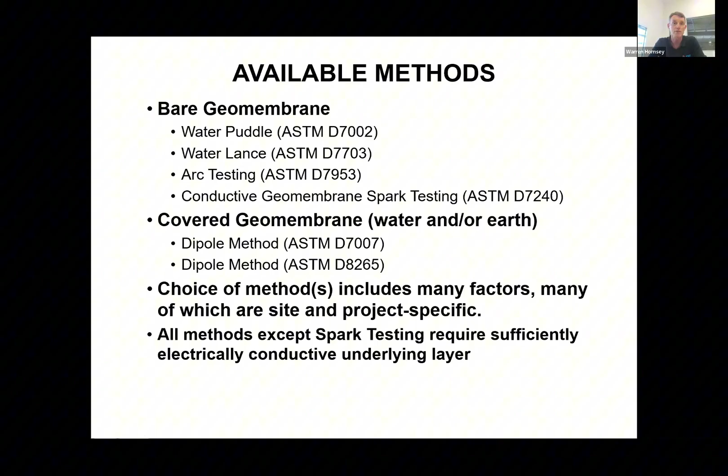There are two basic definitions: bare membrane surveys and covered geomembrane surveys. Bare membrane surveys, done immediately after installation, are easy to perform but extremely operator dependent—if your operator rushes through the job, you may not pick up holes. It's real-time detection, so there's no data collection; you just find the holes. It can be affected by dirt and moisture, but it's very sensitive and reliable. Covered geomembranes are extremely difficult to survey, and there are certain requirements that need to be sorted out before the project is constructed—it's no good coming afterwards without isolation, as that affects results. In terms of sensitivity, it's highly variable and depends on site conditions, from cover materials to subgrade conductivity and so on.

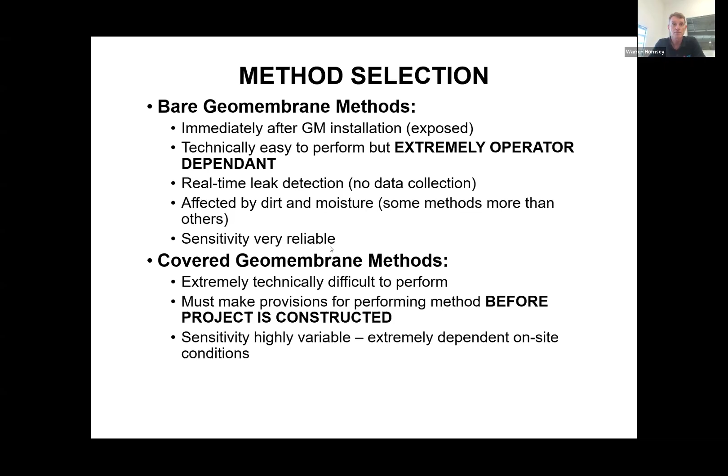In terms of bare membrane surveys, there are the water-based methods, ASTM D7007, the water puddle method. It's a fast way of doing surveys—if you have a nice wide puddle, it's good for dirty, wet survey areas, and it's more effective on wrinkles than the arc testing method. The disadvantage is you have to drag hoses around the whole site, which can be a problem with sandbags weighing down geomembranes. You need not only the surveyor but essentially two labourers to pull and move hoses around. You also can't do it on side slopes.

As soon as you add water and work boots on side slopes, you start sliding down the slopes. It does require clean water. You can't just be pulling water out of ponds because it blocks the sprayers. And isolation is critical. Basically, if you have this water collecting in a sump that is earthed, as soon as the water trickles from the machine to the sump or the earth, the alarm goes off. So that's one of the disadvantages.

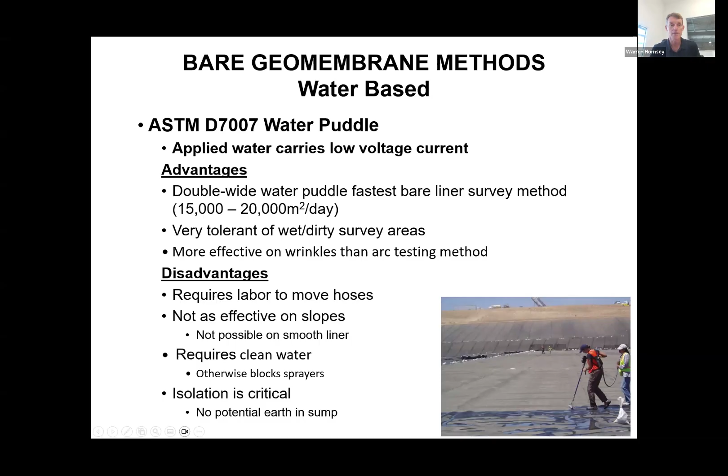Okay, next slide. The water lance method, this was probably one of the early methods of carrying out surveys, and it's essentially a very small area that you're surveying at one time. And it's good for pipe connections and seams, also very tolerant of wet and dirty survey areas. And it's certainly more effective on wrinkles and seams than the arc testing method. The problem is it's very slow because you've got this small concentrated area where you're spraying water on, that's probably 5 to 10 millimeters diameter.

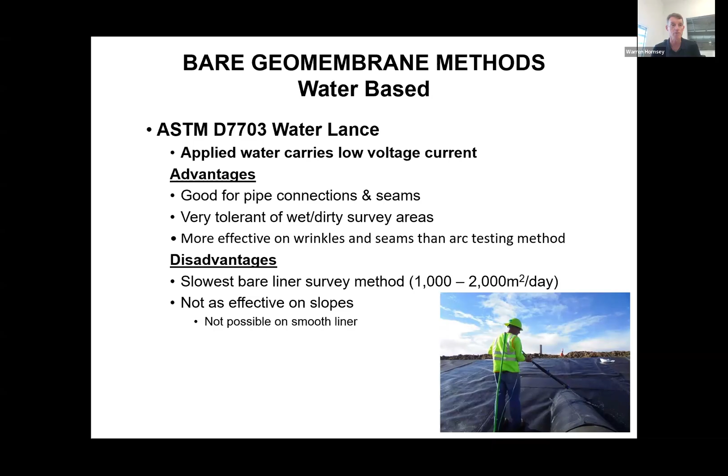And it's just not possible on side slopes. Again, slip hazards are a problem with that. All right, the next slide.

If we go to the arc and spark methods that are out there, we do a lot of this testing on bare membranes because we can find really small holes and they're not limited by water flow through the holes. It can be done on slopes of 3 to 1, but really anything above that, you need to have working at heights certifications. You can see on that image there, one of our technicians hanging off an abseiling rope, working on a large 1 and 2 slope. So it can be done.

It is very slow if it's done properly. You can do it very quickly. You can walk very fast over a site, but you're unlikely to find all the holes because you need to move slowly in order to find the holes. It's extremely sensitive to moisture. So the survey area has to be dry and it has to be clean. It'll earth out against dirt and give you false positives in those areas.

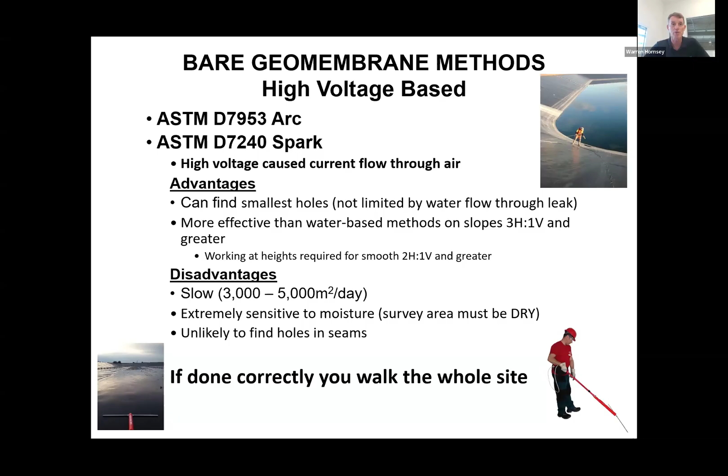And you're unlikely to find holes in seams because the spark will only jump about 25 millimeters. The good thing is that if you do this survey, you essentially walk the whole site, so you do a visual inspection on the whole site. Okay, next slide.

This is what is not acceptable with arc testing, is that you're not walking over the whole site. I mean, you can see the guys are not wanting to walk on a smooth slope, but they're not really pushing down the wrinkles. And these methods don't work on wrinkles because the spark only jumps 25 millimeters. As soon as you have a wrinkle that's above 25 millimeters, you won't find a hole in it. So essentially, the surveyor should be pushing down the wrinkles with their feet to make sure that there's intimate contact. Okay, so next slide.

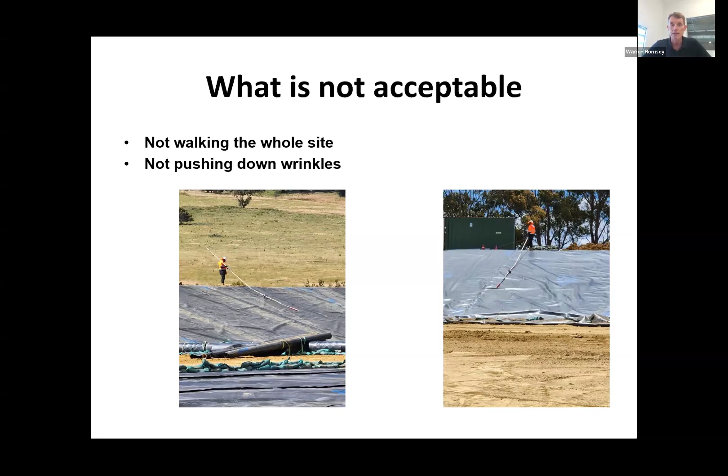The next method is the covered dipole methods or covered geomembrane methods. And the first one is the water dipole. We normally do these with 100 volts going into the cell. They're very sensitive, they'll find holes in wrinkles. And with some of the equipment, we can do mapping on this. Not all of the equipment, but some of the equipment mapping can be carried out with this.

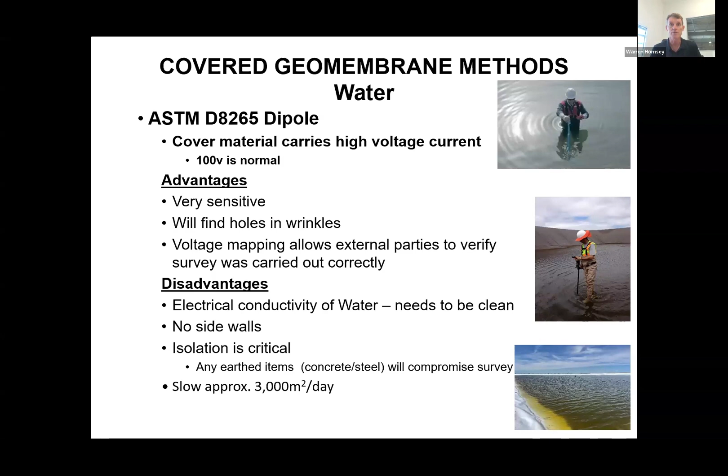One of the disadvantages of doing a water dipole with our equipment is that the water needs to be clean. We can't deal with high conductivity waters inside of there. You can't do it on sidewalls, so basically what we're doing is the floor of a pond, we can't get to the sidewalls. And isolation is critical. Any earthed items such as steel or concrete that are earthing out can earth out the signal and will not allow the survey to carry on. And it's very slow, we're looking at 3,000 square meters a day. If anybody's trying to walk through water that's knee deep, it's extremely tiring and very slow to do this sort of work. Next slide.

The covered geomembranes, and this is kind of most of the work that we do, is this type of work after the gravel's been placed. We normally run the high voltage, 500 volts is normal. We control the amps, so the voltage doesn't kill you, the amps does, so we'll limit our amps to within safe working areas. But the advantage with these methods, if you use a large 3-meter double dipole, you can get up to 25,000 square meters a day. That reduces significantly if you use a single dipole.

Voltage mapping allows external parties to verify the survey was carried out correctly. The problem is that moisture conditioning of that gravel is critical. If you don't have good moisture conditioning, you get lots of bad data, and then you can potentially miss holes.

Isolation is critical. If you have large loss of voltage through poor connections to sidewalls and so on, you again will miss holes. And you won't always find holes in wrinkles with this method, because the water won't necessarily run through the wrinkle and make contact with the ground underneath it.

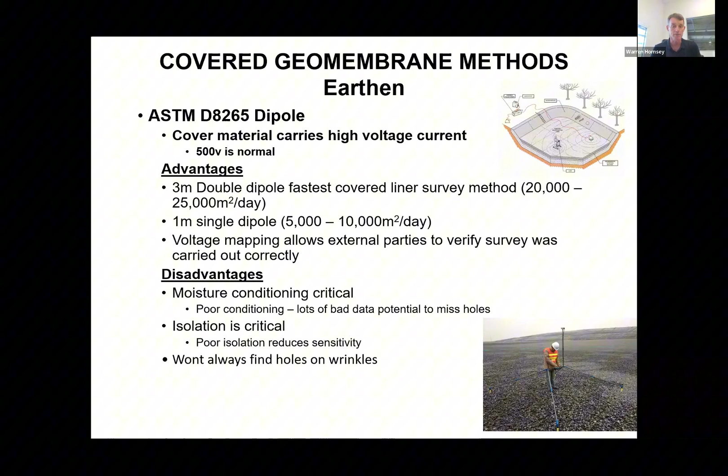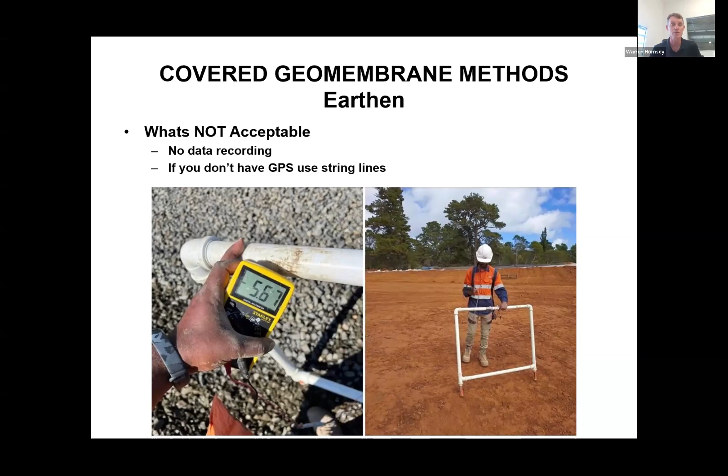Now, this is an image of about as basic a dipole survey as you can do. There's no GPS tracking of locations. It's just a simple handheld voltmeter that somebody has to record the data with as they walk along. Extremely slow and time consuming. This went out of date probably 15 to 20 years ago, so just be aware, don't be using people that use these techniques these days. That is old technology.

When you get the maps, this is the key part of it, really understanding what you're getting. What we're seeing in the marketplace is a lot of a tick-and-flick type attitude with this stuff, and we see mapping that doesn't really make any sense. What you're seeing in the upper left-hand image is a survey where we can't see where the data was recorded, and we see no contour maps of what the voltage readings are.

That's part of the standard. It requires you to show the contours, and it also requires you to show where you've recorded the data. So in the second image over to the right, you can see that the survey was carried out, but there were large areas where no data was recorded. That really is not acceptable from a standard point of view. So anybody getting a report should be looking at both the contours and where the data is recorded.

The image to the far right shows a good survey with regular recording values where you can clearly see the artificial leak in the top left-hand corner of the survey and the current injector in the center of the cell.

Now, the devil is in the detail with all of this, and the standard allows you to play with the voltage contours you see because every site is slightly different. But really, if you put a very wide contour gap on your survey, you can hide or miss holes. Depending on the site, you may have to have a very close contour spacing to really be able to see the holes and investigate the anomalies correctly.

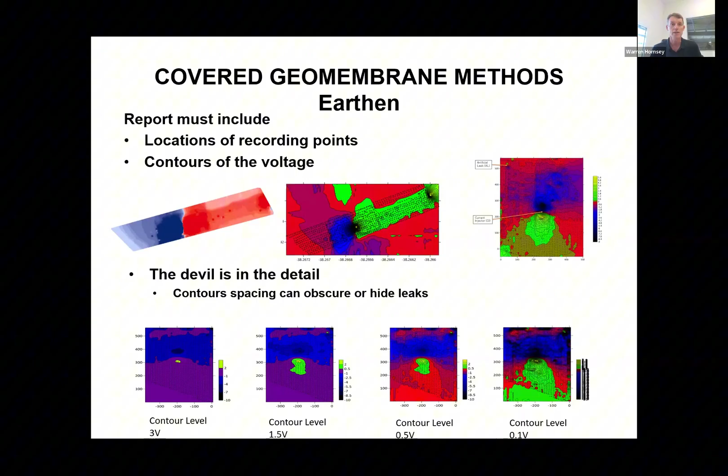The issue is that it's extremely hard to verify that a survey has been carried out to acceptable standards. But to give you an idea, we've been keeping track of our jobs since 2018. We've done 106 sites, 1.7 million square meters, and on average we see 0.78 holes per hectare, which is less than what GRI and so on initially indicated as 2 holes per hectare. But what we're seeing is that with good CQA, the quality of the landfill builds is becoming better over time.

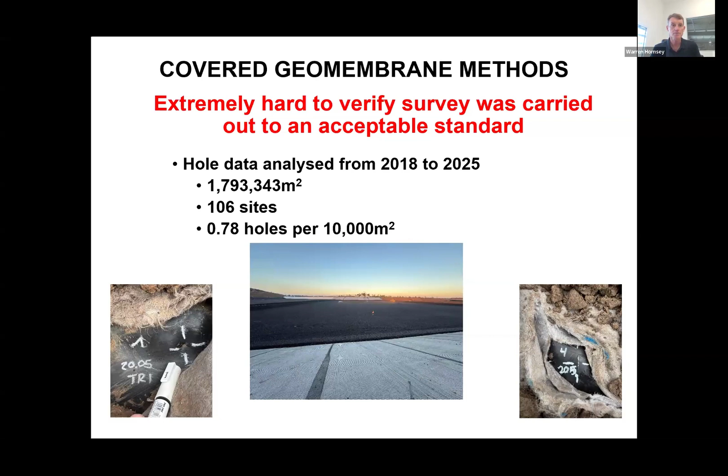So the way to double check this, which I'd recommend for everybody, is to put blind holes into their cells if they're building them. There is a standard on how it should be done. That way, if you go out and do a survey and your surveyor can't find your holes, then there's a problem either with your survey or the sensitivity of the site. Either way, you have to fix that to be able to verify that the cell has been built without any holes in it.

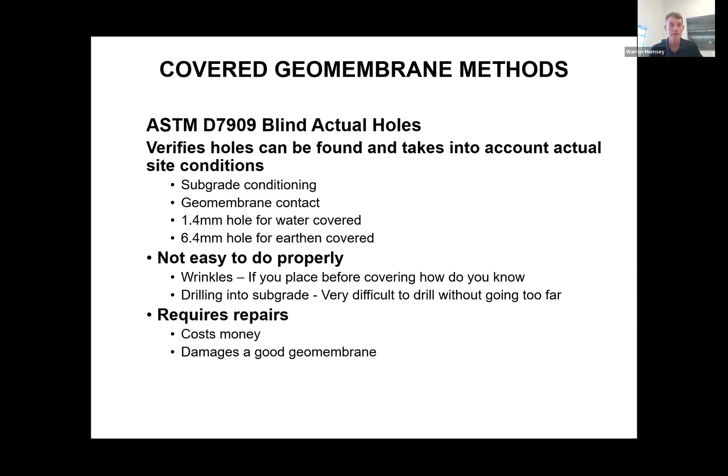Now, lots of people don't like putting holes in a perfectly good geomembrane. The only alternative to this is to put an artificial blind hole in. In other words, just run a wire, place it between the geomembrane and the cover protection geotextile, and have that as an artificial blind hole that people can find. The problem with that is it doesn't really confirm that the subgrade conditions are acceptable, but it gives an indication of whether the person's equipment is working correctly or not.

So I would recommend that everybody put some form of blind holes, whether real or artificial, into any one of their projects before they go ahead, so that you can verify that the survey has been done correctly. It's the only way that you can really verify that your survey has been done correctly.

Like Warren, there's a lot to talk about here. I'm Managing Director of LIS. We specialise in surveying deeply filled lagoons, and some of the challenges Warren talked about I'll discuss in a bit more detail.

As a quick background, what we're really looking for in electrical leak detection is current flow through an insulating liner. If we look at this left-hand panel, we can see current flow - this is a modeled result - through an insulating liner. In almost all scenarios, we're looking to gather data in the overlying conductive medium, whether that's soil or water, using our electrodes and dipole to measure the change in electric field as we pass over the leak.

The right-hand plot shows what a technician or interpreter is looking for when trying to find a leak - this is the classic dipole type signature we might all be looking for. If you're running the 7007 standard, an operator might be looking for this live. If you're using the latest 8265, we're looking for this in a map, as Warren showed, and I'll show some maps as well. So this is really what we're looking for.

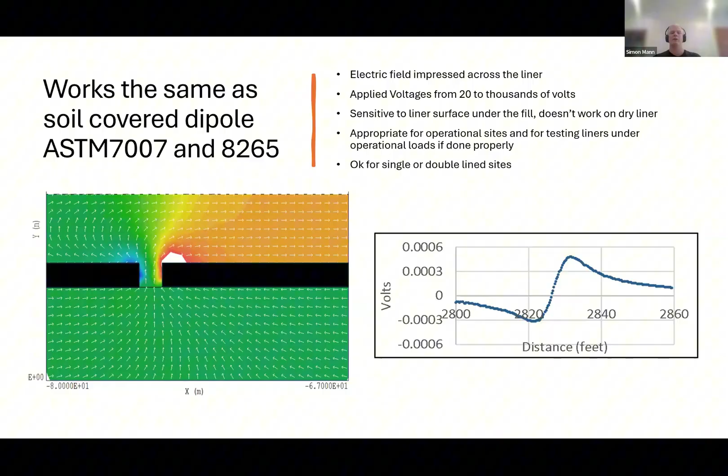We're sensitive to damage beneath the conductive medium we're surveying in - that's below the soil, or at the waterline or below the waterline - and it's appropriate for operational sites, testing the liner under operational loads. We do work on single or double liner sites.

Why are we testing filled ponds? If they're built properly, constructed properly, and used properly, leaks really shouldn't be an issue. But typically our clients have one of a small set of problems: either they know they have a problem, they suspect they have a problem through indirect means, they can't afford to have a problem - i.e. it's a high-risk site - or they need to show they don't have a problem to meet their license obligations.

The benefits of doing this: it's operationally convenient, and less damaging to the lining system to survey it while covered than to empty it and potentially damage it further. It may be your only option if you don't have anywhere to put your waste or water. It allows a targeted repair - if a survey tells you there's a leak in a particular area, you don't need to empty or clean the entire site to access it. And it may be more appropriate to test under an operational load.

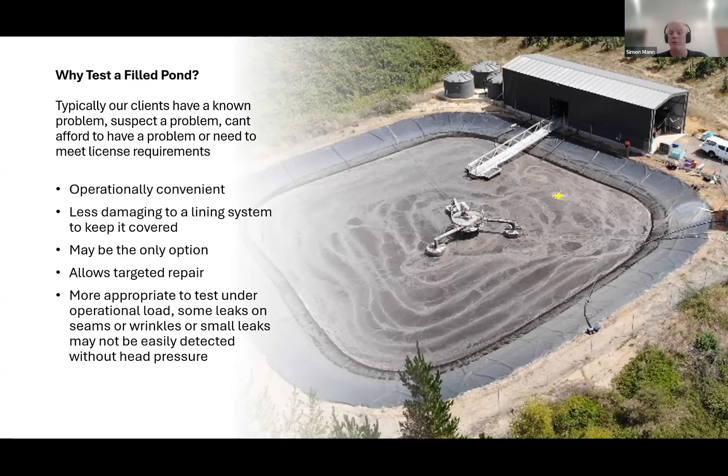And Warren touched on this as well. If you've got a wrinkle, or depending on what your dry liner methods are, you may not be sensitive to all leaks. So that QC process may not pick up everything.

So in terms of where this technology is best used, I thought we'd talk about who uses us, because that's what we know. This site here is a site near Adelaide, a small fruit producer in an ecologically sensitive area. He needs to meet his license obligations, to assure the EPA that his site is being monitored and doesn't leak. Typically, before he found us, his approach would have been to get a crane in to lift out this aerator, remove a walkway, empty the pond, which stops his operations, by the way, clean it, and have dry liner methods used. Obviously very expensive and very disruptive to his small business.

In this image here, you'll see our little boat. You'll see that a few times in this presentation. We turn up and we do this job in half a day. And out of interest, we have found leaks in his site and have helped him towards a leak-free site.

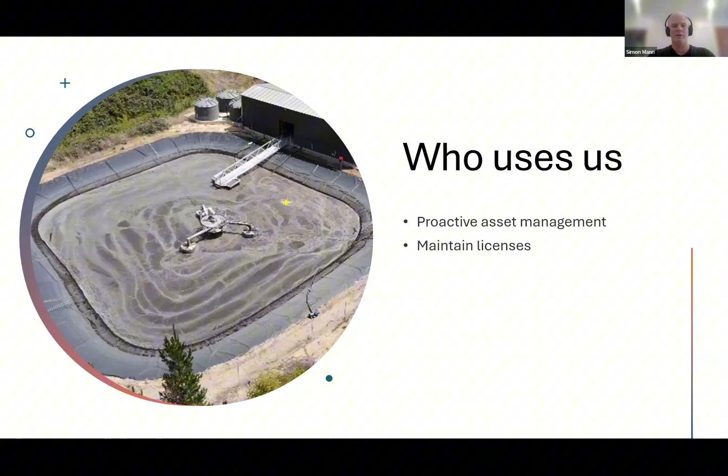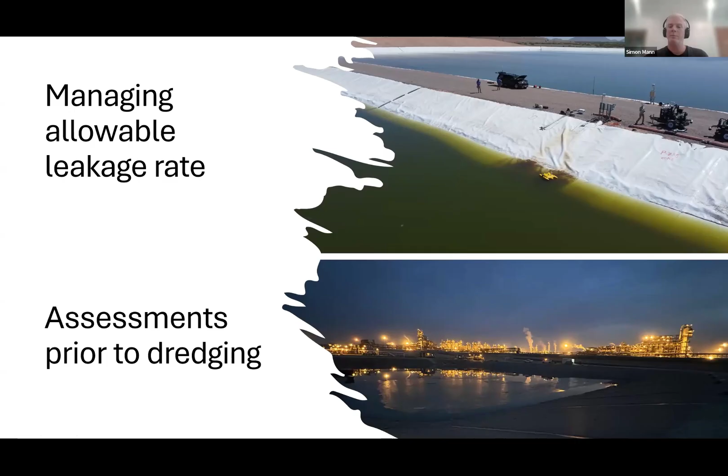We have big industrial sites that we visit. Both of these sites you can see here are from North America. This client knows they have a leak in a brine pond because there's a leakage sump. It's a double liner system. This client knows they have issues because it's a high risk site, and they also carry out regular dredging activities, which means there's a potential for further damage. We'll see some data from a similar site to this in a moment.

But these are the kind of people that know they have problems and will call us in. In that same vein, here we've got an example of a brand new site. This is a huge tank here in Australia, a 17 megalitre tank that on commissioning and first fill did leak. Again, we know there's a problem. This is a double line site at a metal processing plant here in Australia again. So we're there because the client knows they have a problem.

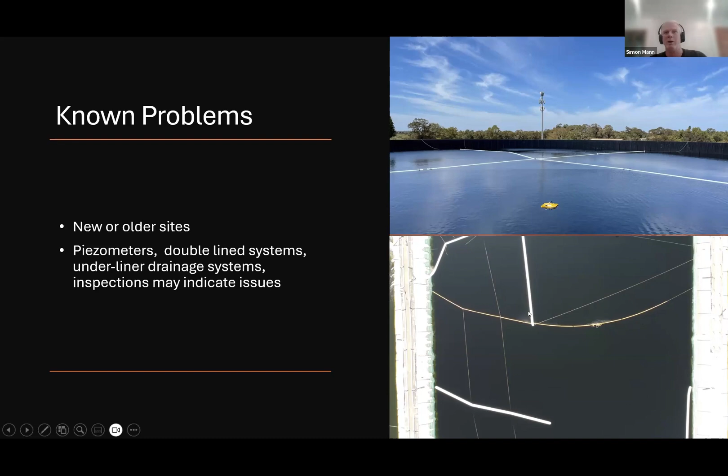This photograph on the bottom right highlights some of the difficulties in doing autonomous or remotely operated leak detection surveying. These sites commonly have lots of baffle curtains, tethers, pumps, all sorts of infrastructure that can get in the way.

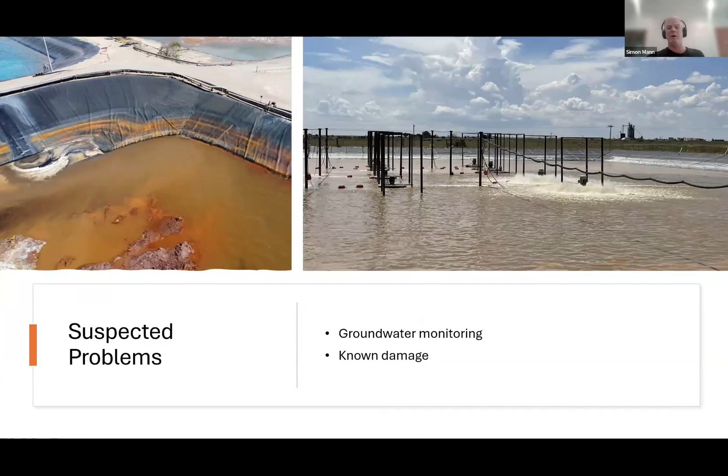We turn up on sites with suspected problems. Both of these sites here—this is a metal processing plant in Australia, and on the right-hand side we've got a dairy site in the US. Both of these sites suspected they had problems because of groundwater monitoring nearby. So they don't know, they hope they don't, but they suspect that they do. So we're there for that reason as well.

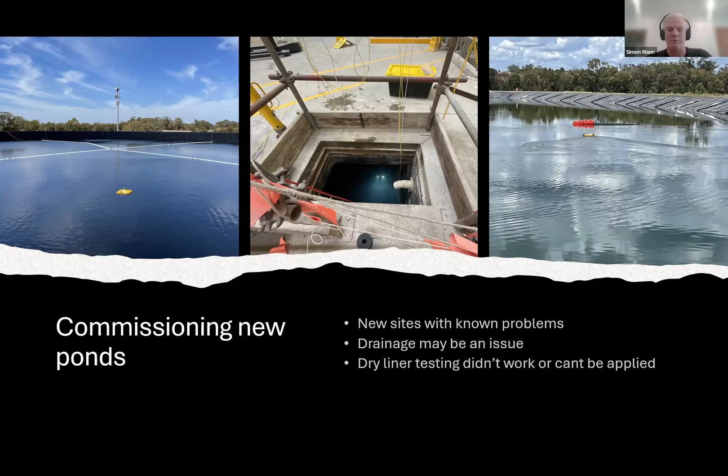So how would you tackle this traditionally? We would commonly be doing what Warren was talking about, carrying out a wading survey. As he says, there are issues with that. Primarily you've got land-based equipment being used in a water context, and the operator needs to be in safe operating depth, so we're looking at 3 to 4 feet to work in. A lot of ponds have sloping floors, which means that if you want to survey the whole site, you need to be changing the level during the survey.

So relatively slow. There are drag probes—companies offering drag probe surveys, which is effectively dragging those sensors across the bottom of the pond using ropes and or cables at the side of the pond. This can be effective, but it's physically demanding, has high labour requirements, and has relatively poor location accuracy depending on the site and the weather conditions and all the sort of things that you might have problems with dragging cables across a pond.

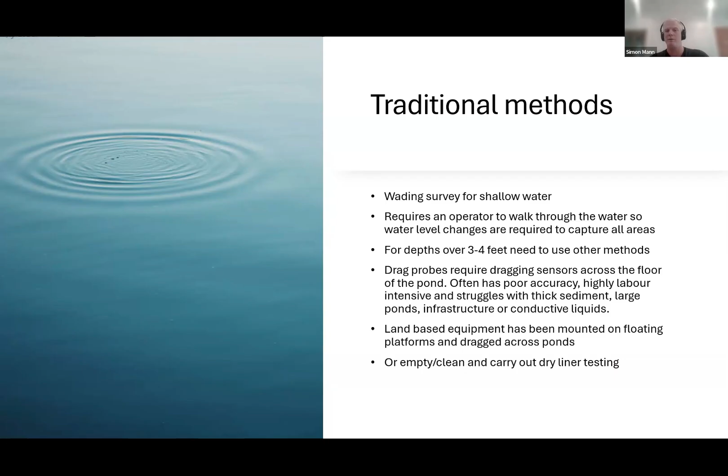People have attempted to put land-based equipment on floating platforms and move those around on the surface of a pond as well. Or you have the old option of emptying and cleaning the site and then applying dry liner methods, as Warren described.

So in the last 5 years, USV or unmanned surface vessel technology has come a long way, and this is partly what we specialise in. We're not the only company that does this, there's very few others, and as I mentioned, there's not a lot of information on what else is available. So what I say here reflects our experience and our knowledge.

These are small vessels which basically have data logging systems on board, and to meet the new standard, we've also got highly accurate GPS as well. Our boat is maybe 1 metre in size and is easily deployed into the pond without a person going into it. We've worked in ponds over 10 metres deep. There's not that many industrial sites deeper than that, but that's the deepest we've detected leaks in, and anything deep enough for the boat to sail in, basically.

You do not require technicians to enter the site. It can be carried out while the ponds are in service within reason. It offers a chance to test the liners under operational conditions, and it allows management of issues without having to drain the site. As I said before, if you know where your leaks are, then you can start to come up with a plan without having to affect your operations.

To carry out in dangerous environments, we've worked in brines many times, seawater concentration, caustic brines, and we've worked in acids as well. So the boat will go into more or less any liquid, and we're not hindered by those sort of conductivity issues that Warren spoke about.

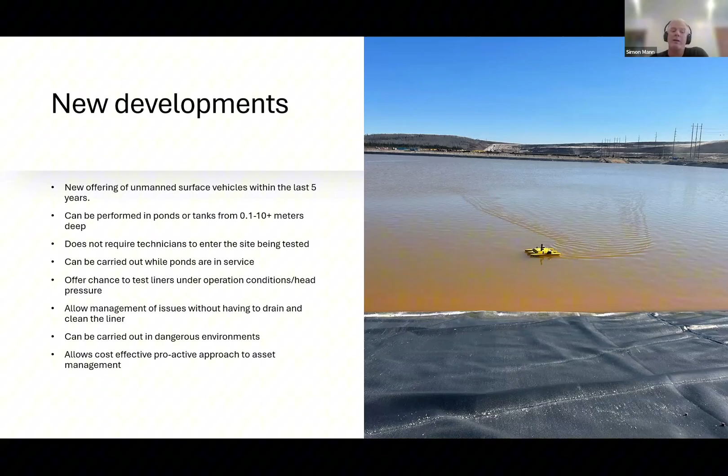And it allows a cost-effective, proactive approach to asset management. There are challenges, though. It can be very difficult to do what we're doing. I think most commonly the signal strength, and I'll present a little bit about that now.

The signals we're looking for in deeply filled lagoons would be 1,000 to 10,000 times smaller than they would be in a soil ELL survey. So really the recording system needs to be able to remove and filter unwanted signals such as electrode offsets, telluric noise, electrochemical signals. These alone can be more than 10 times the signal you're really looking for if you're looking to pin down multiple leaks in a deep site.

Current soil covered equipment, as far as I can see, is not equipped to do this and is not suitable for simply sticking onto a floating platform.

There are obstacles in the water. So there are 2 photographs here that clearly show the sort of things that we work around. We've got a large aerator here on the right. On the left, we've got a site with 16 aerators. Not easy, but just the logistics of data collection in these environments can be challenging.

There's a lot of grounded infrastructure in these sites. It's not possible to excavate a trench like it might be with a soil covered. So isolation is a real issue, as it is for all leak detection methods.

We can work in conductive liquids. If you're playing in the space where you're looking at microvolts to millivolts to look for signal strength, then you're also sensitive to changes in bottom topography. So, for example, a bund being present at the bottom of your pond will concentrate current above it and may generate a signature that looks like a leak.

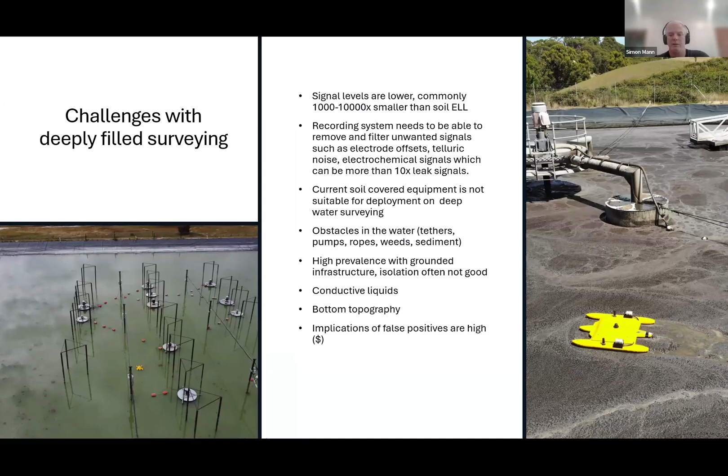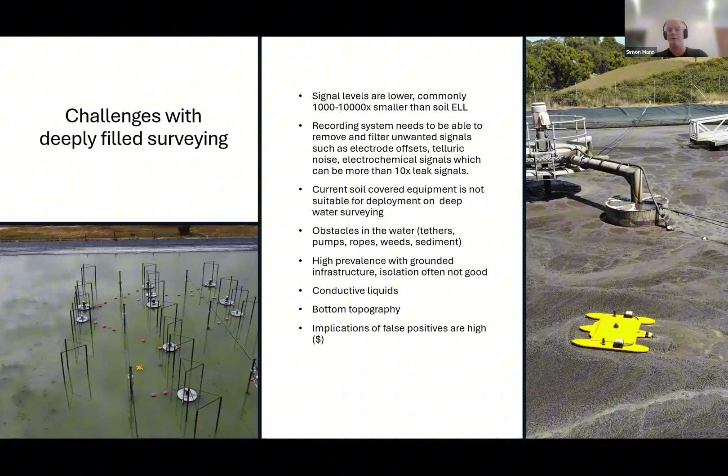So we need to start to think about things that aren't common in other ELL applications. And we have to think about the implications of false positives as well. The cost for any of our clients to excavate or empty a site and clean, looking for damage if it's not there, is high. So this needs to be a service that's carried out to as high a standard as possible. A lot of this is done in digital processing, and as Warren talked about a little bit as well, 8265 requires the provision of a geo-referenced data set that somebody else could interpret.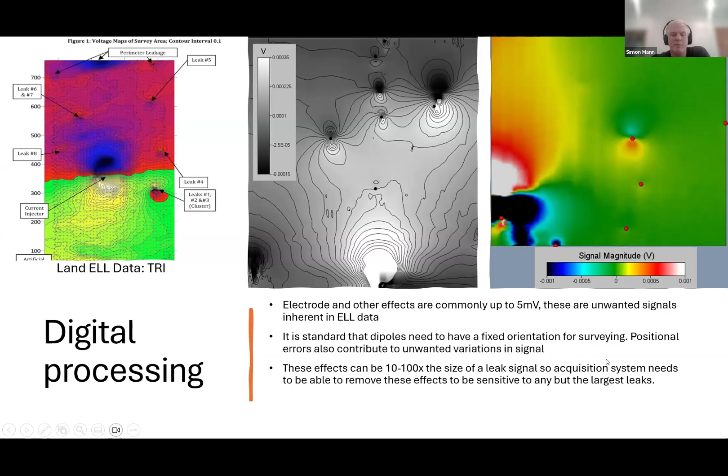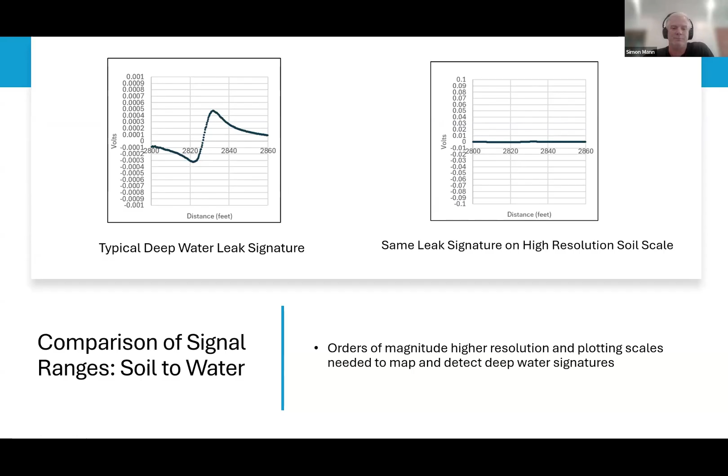We need to maximize the current flow through every leak, so it's really important to plan your site and plan your survey properly. As Warren explained, going right back to the design of the pond is also really key here.

We often don't have the opportunity to isolate and retest like you might do with soil surveys. For example, in a soil survey you might take a big leak and excavate and isolate it so you can carry on the survey and hope to see subsequent leaks. We don't have that opportunity with deep water surveys, so we need to be able to see multiple leaks at once. If isolation issues can't be removed or reduced, some assessment of blind spots should be reported.

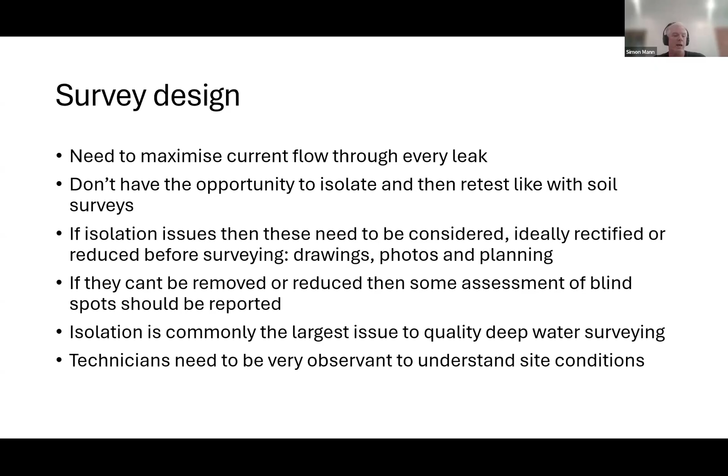Isolation is commonly the largest issue to quality deep water surveying we have, and we really look to our clients to help us with drawings, photos, planning. It's really usual for us to turn up on a site and be surprised by something that's there, so this is where the client can really help with a quality survey, and technicians need to be very observant. If we don't get full electrical isolation of a site, we can have issues, and this affects all leak detection surveying.

LIS has developed a method we call current shielding, which reduces the effects of poor isolation for infrastructure. This is not a panacea - we're not suggesting in any case that we shouldn't be looking for complete isolation, that is best practice. If that can't be done, we can apply current shielding.

The bottom two panels here show a before and after current shielding scenario. On the left, we've got a conventional ELL setup where we've dropped a current injector into a site, and we have four very well-grounded pipes entering this thing. What we're generating there is a very strong field within the site that swamps our leak signatures. By applying current shielding, we can reduce this substantially, and those leak signatures start to pop out.

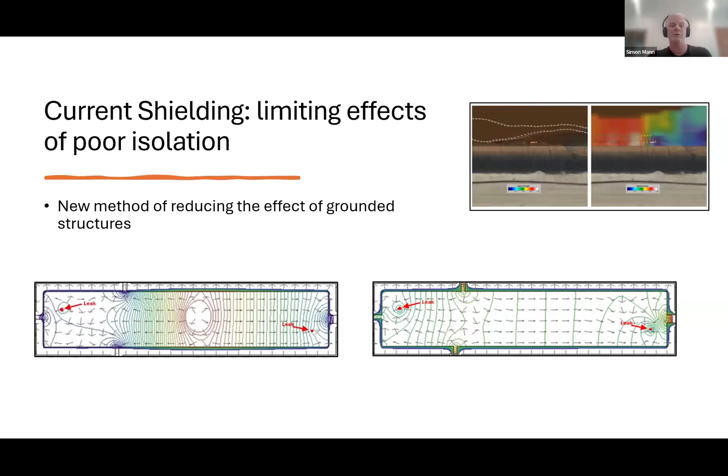On the top right, that plot is a real example of a site that we surveyed - this is the same leak on the same day. In the left-hand panel at the top, this is your conventional ELL setup, and there's really no response due to that leak, marked as a red dot. On the right-hand side, we've got a current shield example where there's a very clear dipole response from a leak. So there are things you can do if isolation is poor.

Survey speeds, typically when the boat is on the water, will cover over a hectare per hour - that's over 10,000 square meters per hour. But the boat being on the water is just a small part of the total surveying, from the setup of all the equipment to the data review, to surveying this area more than once.

We would commonly survey a site at least twice completely to give us two independent data sets, or even more. On average, we would work to about 2 hectares per day. This is on the upper end of what you'd achieve with manual surveying - similar productivity, but the data density is way, way higher. We'd be collecting data every couple of centimeters, whereas a manual method might be every couple of meters.

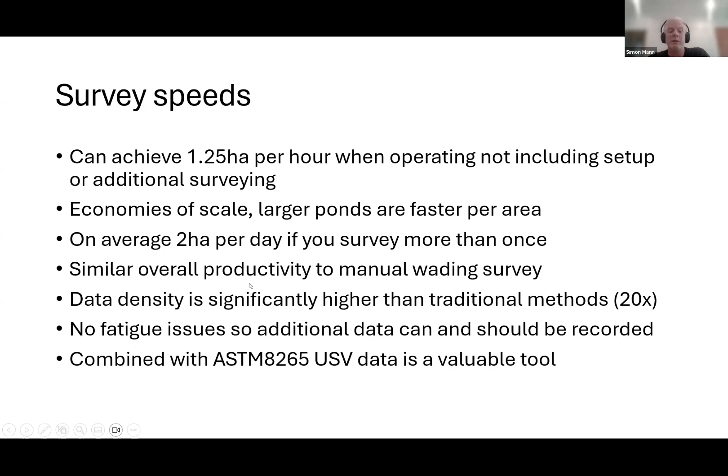With autonomous vehicles, we don't have fatigue issues, so it's easy to get more data. And I would always argue more data, more data, more data. If you combine a USV with the latest standards, then you've got a really powerful, really useful tool.

Now we'll look at some examples. The top here is a plot of some data we've collected in North America. This is a site we visit regularly because it's prone to ongoing damage and it's a sensitive environment. The red dots here are anomalies identified in this year's data. The white dots are anomalies identified in previous years' data.

So what we can see from this plot alone is that, A, there's been successful repair of multiple leaks. B, some of these leaks have not been successfully repaired. So that's a question for the lining contractors and repair crew to understand why they haven't repaired it properly, or what risks there might be in that.

If we look at the bottom left panel, there's an aerial shot showing this anomaly, and it's associated with a pipe over the crest. Now we see this quite a lot - a lot of damage due to operations. So we start to help the client understand where the damage is coming from.

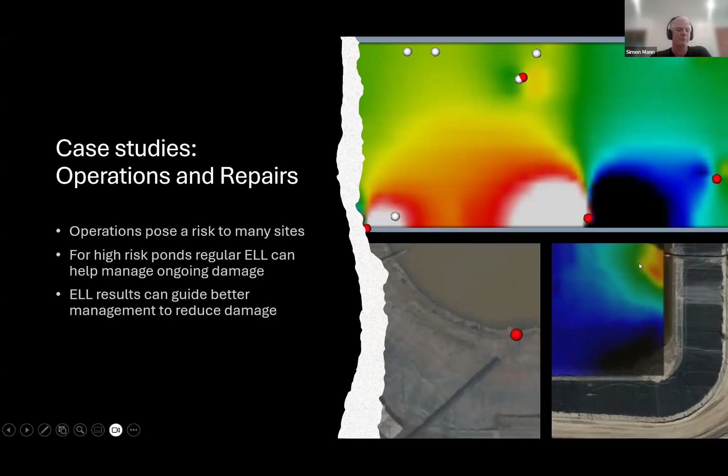Similarly, on the bottom right panel, we've got a very strong leak anomaly associated with a very large over-the-crest pipe. In this instance, the client was looking to ignore this signature because they felt it was the pipe causing it. Because our technicians were observant on site, we could say we looked at this pipe - it's purely HDPE, it should not produce a signature like this. They did go and inspect this area, and they found a 2-foot gash that this pipe had put into the liner. So again, ELL done properly can guide better site operations.

So what have we learned? Leaks can occur in a pond due to any of three stages. You've got the design - and I guess there are others far more expert at designing ponds than we would be - but things like poor drainage or a lack of spillways, improper subgrade, or underliner drainage systems that don't work very well, these might contribute to damage to the liner. You've got construction - low quality installation, poor weather while it's being laid, unsuccessful welds - all these kinds of things can lead to leaks. Or you've got operations, and this is what we see a lot.

This might be over-the-crest pipes, ponds left dry, or animals trapped in these sites, which can cause damage as well.

Our boat is equipped with sonar as well. If we look at this top image, we've got a side scan sonar image of the bottom of a pond we've been surveying. If you're not used to looking at these, they're a bit like a grainy black and white aerial photograph. We're looking down on the lining system here, and we can see whales developing, or bubbles in the liner developing under this pond as we're surveying it. You can see the tension and the wrinkles that these whales are causing on the liner. This is not something a liner is designed to cope with, and it's going to lead to failure at some point.

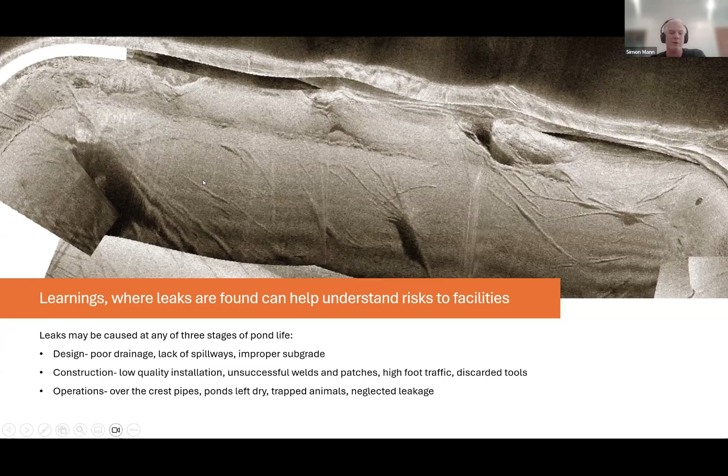And further advancements - I need to mention our submersible technology. This works in the same way as all the rest of it, but you can put it into covered storages. It works down close to the liner. We've used it in verifying repairs - so we might have a dive team go in and make repairs, and the ROV can fly over it and confirm repairs and things like that. So this is the latest development in the ELL.

And that was it. So thank you.

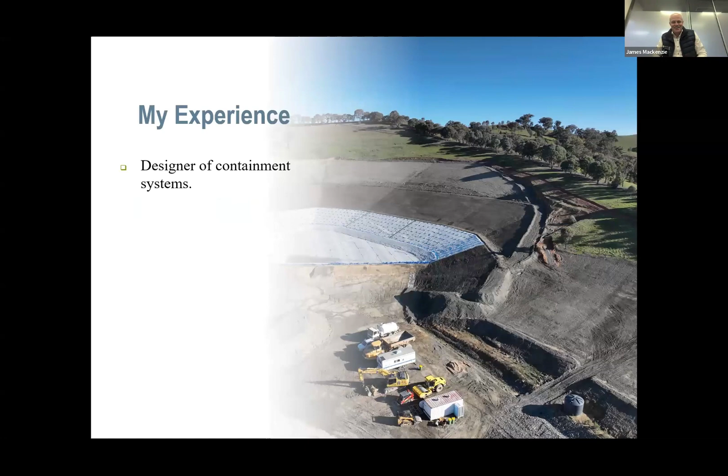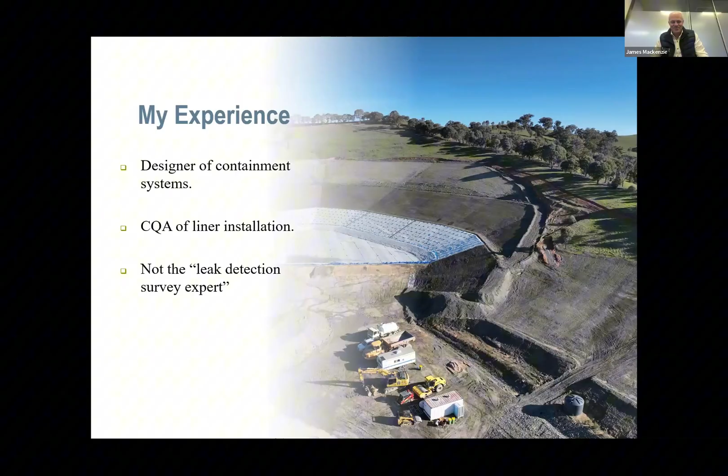So quickly about me: I'm a designer of containment systems, largely in landfill applications for landfill caps and baseliners. I also have a history of undertaking CQA inspection, which is what I did as a graduate. My company, Mackenzie Environmental, routinely provides those services, largely in the landfill space in Victoria. And I'm definitely not the leak detection survey expert - I think we've just heard from two of them, so I'm throwing in a different angle.

Thanks, Alicia. So, understanding leak detection surveys. So from a designer and asset owner perspective: do we need a leak detection survey? I would say yes, definitely. It's now pretty much, in the industry that I work in, standard practice.

And if so, which one is appropriate? So both. And as a designer, you need to understand that when you're specifying it, so that come construction time, it all runs smoothly.

Can a leak detection survey replace full-time supervision? Well, I mean, it can, but I would suggest it doesn't. And we'll get to why and some examples of that later on.

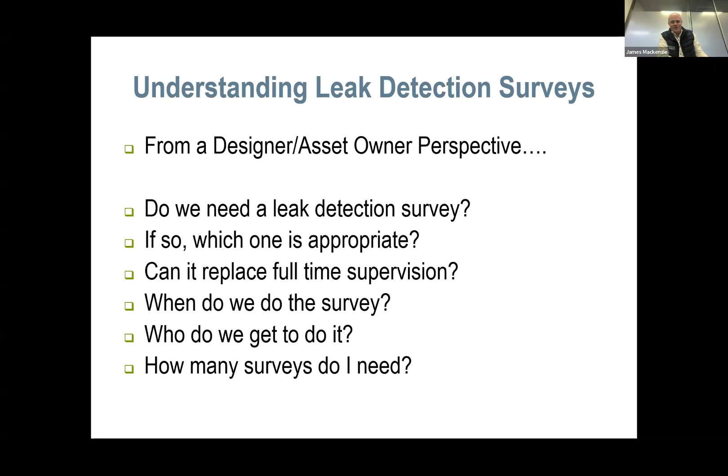When do we do the survey? So for my designs, we specify the survey to occur after we've placed the leachate collection aggregate in the floor of the cell - so the dipole testing that Warren was saying his company does a lot of. That's the experience that I have with leak detection surveys.

Who do we get to do it? Well, we've just heard from two people you could probably call, and there are others. And how many surveys do I need? As I say, I specify the one survey at the end of the works, after the leachate collection aggregate's gone down.

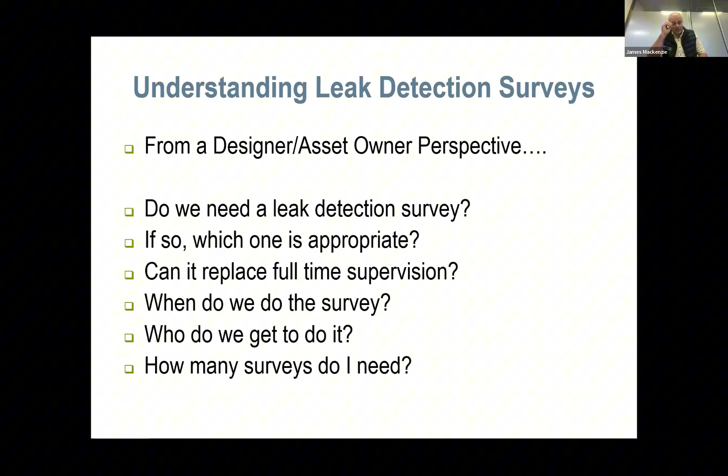We often get asked, well, why wouldn't you survey it before that? Well, we're pretty comfortable before that with full-time supervision, that there's not too much concern. And the survey is largely to provide confidence that the process of placing the aggregate on the liner hasn't led to damage. Thanks, Alicia.

So how do we minimise holes and get the best possible liner installed? Because that's what we're on about. Next.

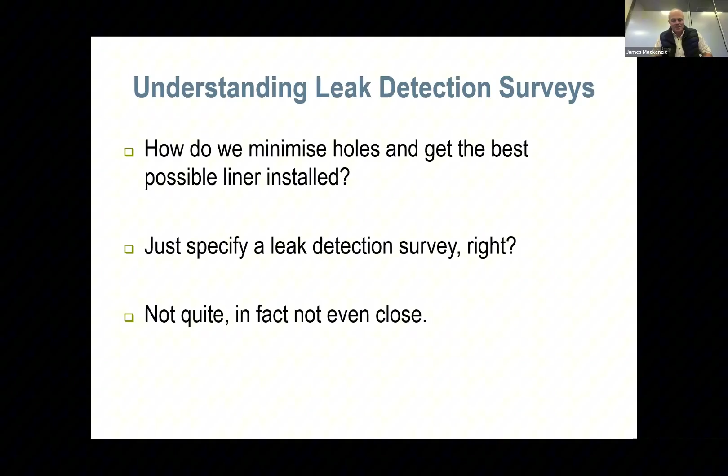So no, we don't just specify a leak detection survey - in fact, I'd say not even close. Keep going, thanks Alicia. So you need to start with a robust design. Without a well-designed liner, you're in trouble. And when I say well-designed liner, I mean the design is the entire package that is specified.

So that includes specifying how the cell is to be built, with what plant, what are the restrictions - specifying trial pads, ensuring you've done some compression testing if you're putting aggregate over the liner system, and so forth. Secondly, you need to engage an experienced installer. There's only so much a good design and some good CQA can do, so an experienced installer is certainly part of the package.

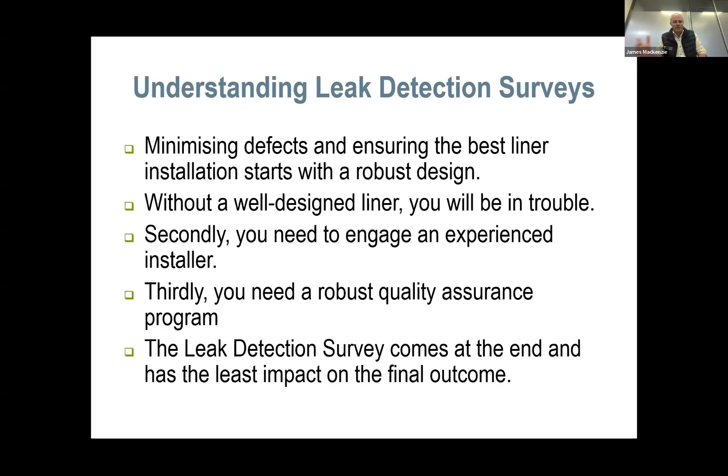And thirdly, a robust quality assurance program. So typically we have full-time inspection and testing services during construction. And then the leak detection survey comes at the end, but in my opinion, it's got the least impact on the final outcome. Next.

Thanks, Alicia. Yeah, so I'd say think of it as an audit, a financial audit. If you've been doing everything correctly, ticking all the boxes, engaged the right accountants, paid your taxes, you've probably got little to worry about. But if you've been cutting corners, you'll probably be found out. Thanks, Alicia.

And so now we'll go to some case studies. One's a good news story and one's an example of, I guess, what I am saying here. So, Victorian landfill circa 2007-2008.

There were issues with the design. I won't go into it greatly, but the design was lacking in nearly all the processes that would be part of a design in a landfill in Australia. There was no CQA requirement during the aggregate spreading, no need to conduct a trial pad, and the design didn't include compression testing.

Subsequently, the auditor required a leak detection survey to give himself some confidence that this liner was installed as intended and would perform as intended, because there was some concern. The subsequent leak detection survey, possibly the first in Victoria on a landfill liner, found an estimated 1,000 holes. The survey stopped.

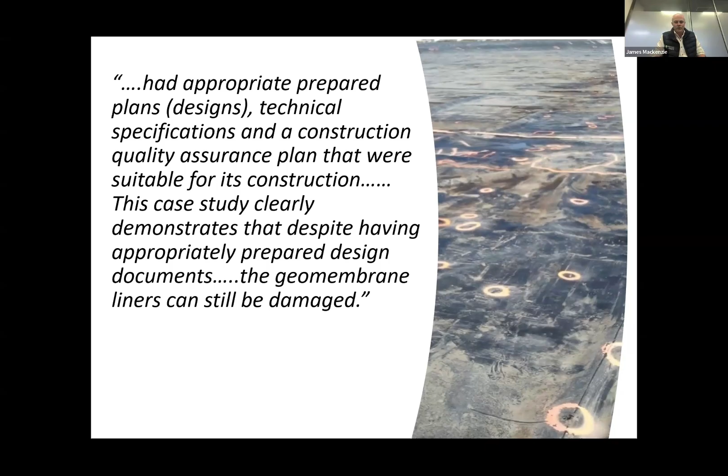There was a paper written on this, and it said that appropriately prepared plans had been put in place. The case study clearly demonstrates that despite having appropriately prepared design documents, geomembrane liners can still be damaged.

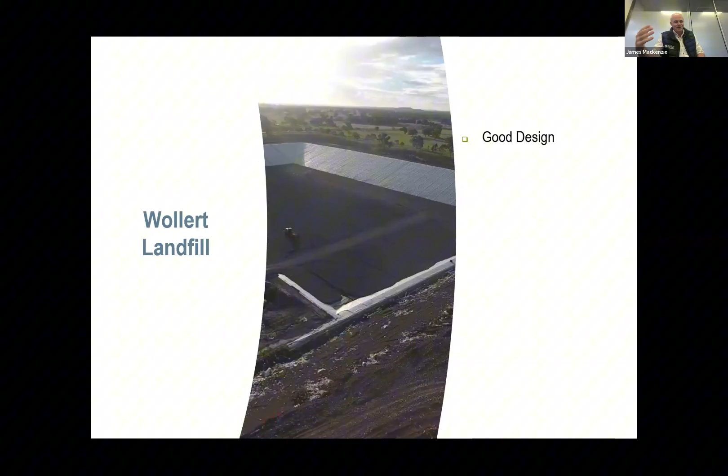I would say sort of. The design was lacking, the supervision requirement, which comes out of the design, was lacking, and what the leak detection survey had to say was indicative of what had gone before it.

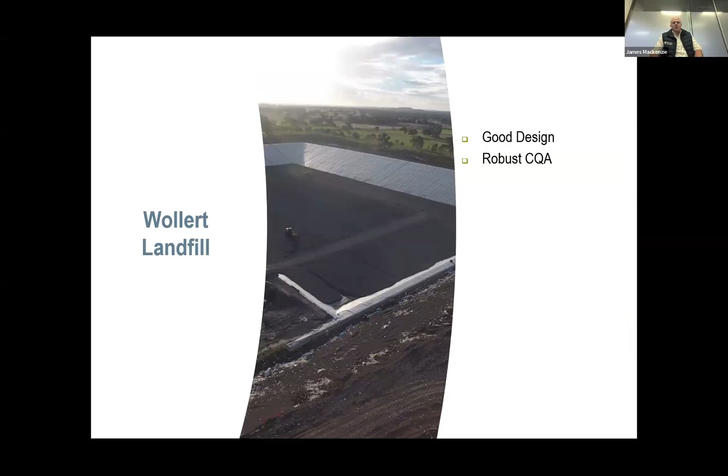On the flip side, the Wollert landfill in the northern suburbs of Melbourne was one of the first landfill sites to have a leak detection survey, and that came about because of the manager of the site at the time, Sam Bateman. He decided he wanted it, which was probably a little unusual, and he was ahead of EPA Victoria before they mandated it. I think the first cell that had a leak detection survey, he got them from Eastern Europe to come out and survey it, and it's probably had more than 10 cells now subject to leak detection surveys.

It's always had good design - I might be a bit biased there - but it's had robust CQA. It's always had trial pads conducted, and typically, from memory, the surveys have found just in the order of 2 to 4 holes per 3 hectare cell. So that's a good news story, and that's what you want your leak detection survey to be telling you at the end - that everything that went ahead of it got the right outcome.

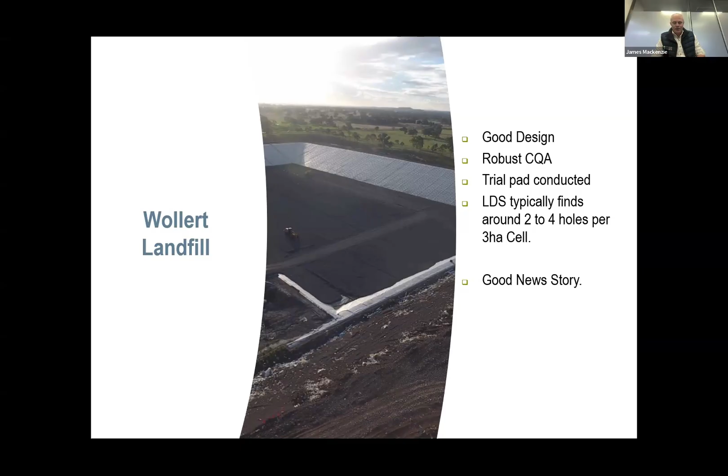So in closing, leak detection surveys form part of a complete CQA package, absolutely. It's an add-on to full-time supervision, and with quality design, an experienced installer and good robust CQA, you'll get a good news story from it. But with a poor design and a lack of suitable CQA, and if you throw in an inexperienced installer, maybe brace yourself. And what's our aim really at the end? For the leak detection survey to confirm that all that came before it was appropriate. Thank you.

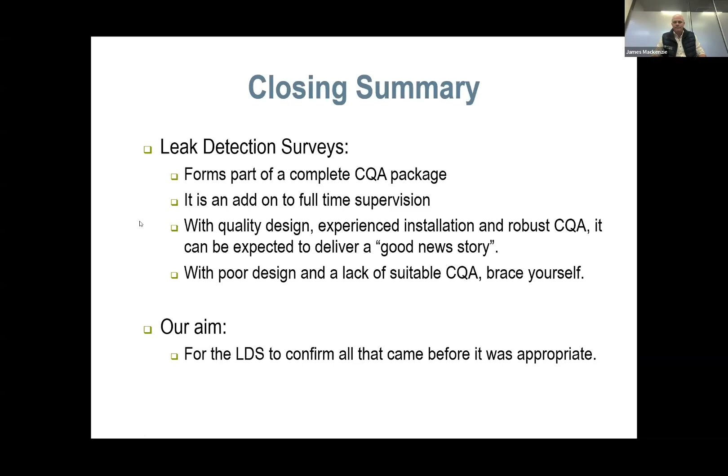Thank you, James. I was wondering who was installing the other one in 2007.

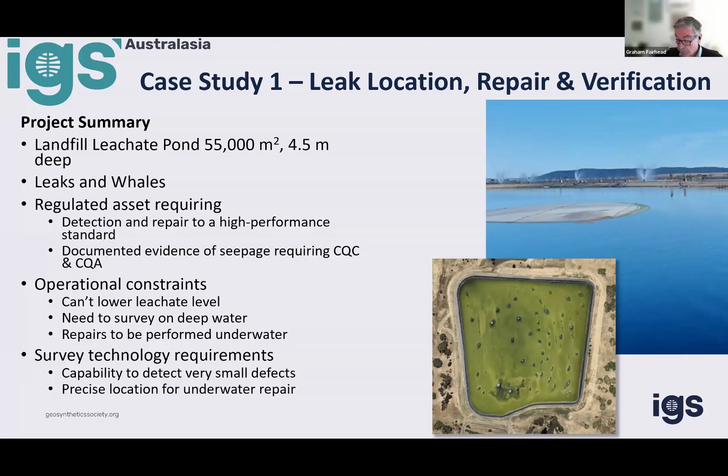We had to work in toxic deep water. Because of that, there were 2 fundamental requirements of the leak location system. One was it had to be capable of measuring microscale defects, which conventional technology couldn't do. The other was that it had to be really accurate in terms of location. We couldn't be sending divers into toxic liquid where you can barely see anything, trying to find where the defect was. They had to be able to find exactly, very precisely, to just a few centimeters where the defect was.

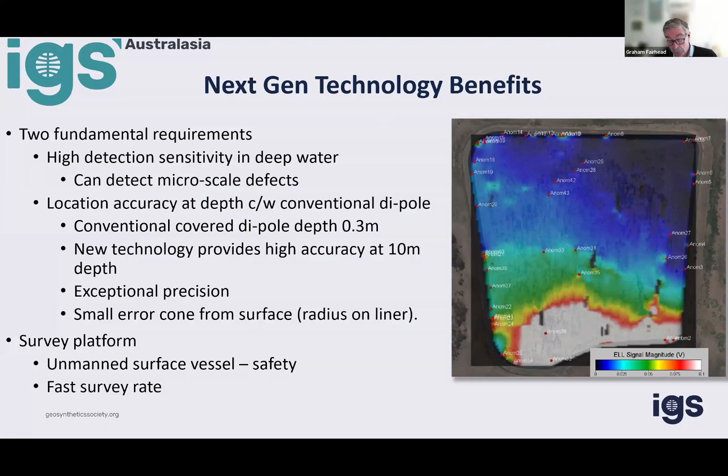Again, impossible with conventional technology. And from a safety point of view, using an unmanned surface vessel obviously avoided people dealing with that nasty environment, improved safety, and was much quicker than alternatives.

So what we did was initially deflate the whales, which had prevented surveying those features. Indeed, when we commenced the survey with the sonar, we found quite a few submerged whales that hadn't yet surfaced, which was interesting.

The survey environment for this technology was actually not overly complicated. The liquids were okay to map in, not too deep, 4.5 meters, so the survey was relatively predictable and trouble-free, which is great for emerging technology.

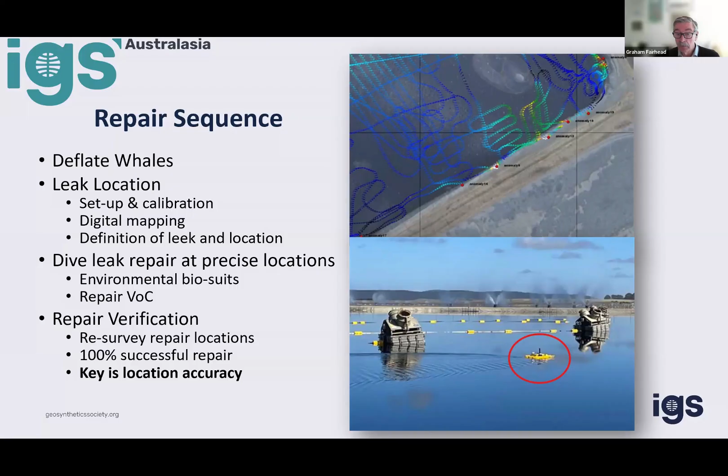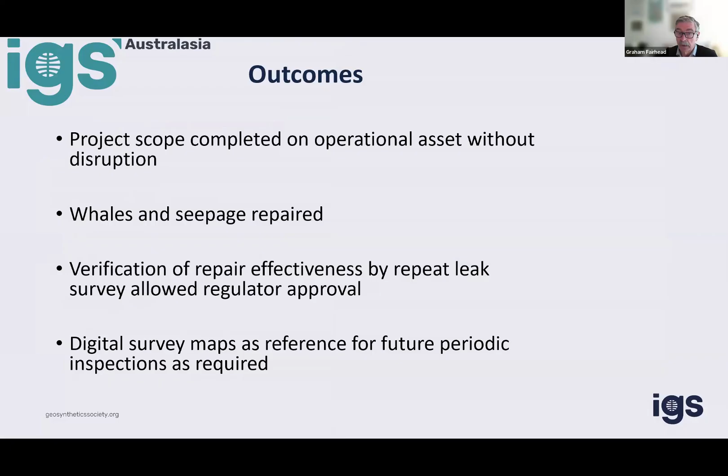The repairs were more troubling. We had to undertake VoC processes to satisfy the regulator that we could perform suitable repairs, and then the acid test was performing the post-repair survey to confirm that the leaks had been fixed, and that's what occurred. In actual fact, every leak had been successfully repaired. It would not have been possible to undertake any of that work other than to empty the pond alternatively.

Second case study is about commissioning best practice. The example here is a high value asset - you wouldn't do this on low value assets, but a high value asset, a potable water system. It's a lined and covered storage. It's much more complicated now because before water goes into the asset, the floating cover is installed, and then you're denied access to the lining system.

What this technology allows us to do - initially we use normal construction quality control procedures, overlay on top of that with electronic arc testing to make sure the barrier system, the liner, is to the highest standard through conventional techniques. And then we traffic all over the lining system, installing a floating cover, which is obviously a risk. As you're deploying the cover, you're then concealing any problems that you might have created.

So apart from using processes based on experience, there's a risk that there's some kind of damage to the lining system. So post completion of the whole asset, best practice for us is to have a wet commissioning process, put full hydrostatic load onto the system, and then inspect.

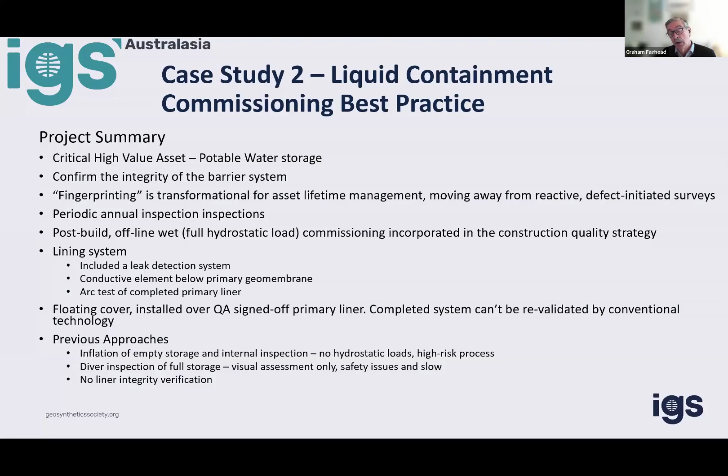In this particular case, the lining system was a primary liner, a conductive medium, a non-conductive medium, a drainage system, and a secondary liner.

The survey platform was an underwater drone. The drone's been developed so that it fits through a conventional diver's hatch. Most assets like this, floating cover assets, have a diver's hatch, so that's really a key requirement, so that you can replace the diver with the drone.

And the drone is equipped with leak detection capability, cameras, and sonar - not that we need sonar in this particular case. In terms of inspecting, on top of all the conventional work we've done, some defects, particularly cuts, can seal at no or low hydrostatic head, but at full hydro head, we open up these defects and we're able to find them.

The leak location component is really accurate because the drone obviously flies close to the surface of the geomembrane. So while the technology is able to do deep water survey, we don't need to - it can fly really close to the geomembrane.

In these assets, typically, there are little outlet structures, concrete and a few things that you can't eliminate. Simon mentioned techniques to help survey close to these features and still get good quality signals.

Another really useful benefit - not uncommonly, the drainage system is not totally sealed, so there is some element of groundwater getting into the drainage system underneath the liner, and so you can measure the flows, if any, and the water chemistry, and try to estimate seepage rates. This gives a third element to better quantify and have confidence in the level of measured seepage rate.

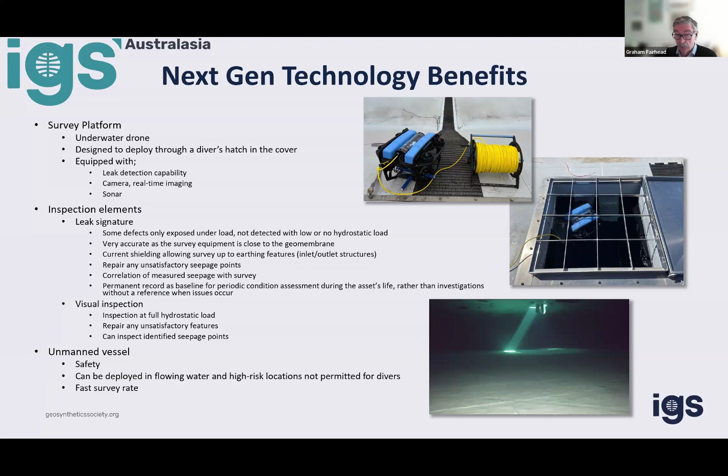The outcomes of these kind of studies, which we now do on most potable water assets, it's a quick commissioning process. If there are defects, they can be fixed. Importantly, these assets with a life of 30 plus years, typically 30 to 40 years before recycling the geomembrane materials, you've got this excellent fingerprint of the as-built condition that each subsequent annual or biannual inspection can compare with. You're not looking at a picture or a video in isolation - you know exactly what happened before.